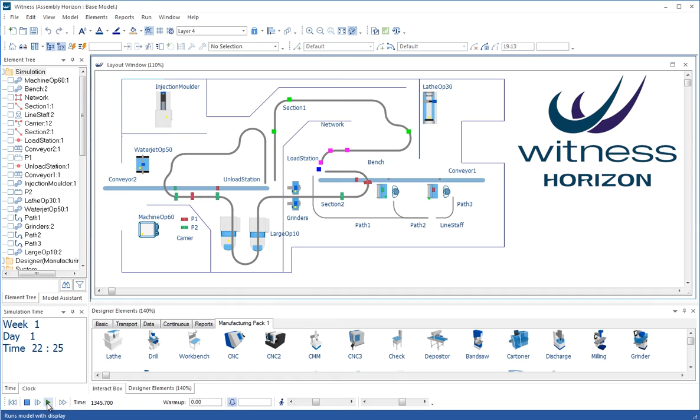Our 3D offerings continue to be underpinned by the best - the integrated 3D views and the optional immersive 3D platforms powered by Virtalis into the latest headsets and power walls. Witness Horizon is built for speed and quality of presentation.

Let's have a look at the release in more detail. This is in the Manufacturing Edition of Witness. There is also the Service Edition, which we'll have a look at a little bit later.

On the Start page, you have access to a lot of information - for example, all the recent models that you've used for easy access to those. You have a Getting Started section. When you click on that, it takes you through to the 2 Learning Witness books, all of which have been redone for this release. Essential reading if you're going to start using Witness for the first time.

We've also put in this section now the Witness Horizon release notes. So if you're interested in learning in even more detail than this session gives you, then please have a look at those release notes there.

Then there's a link to some new video tutorials to take people through in detail how to begin using Witness. Then a link to sample models in Witness - every single model has been updated for this release, so there are a lot of models in here. We'll have a look at a few a little bit later, but a lot of these models have been updated to illustrate the new features and the new graphics, especially in Witness Horizon.

A new quick reference guide with all the new functions and updated toolbar buttons and the like, and then a range of other access to other information, including the Witness Support portal.

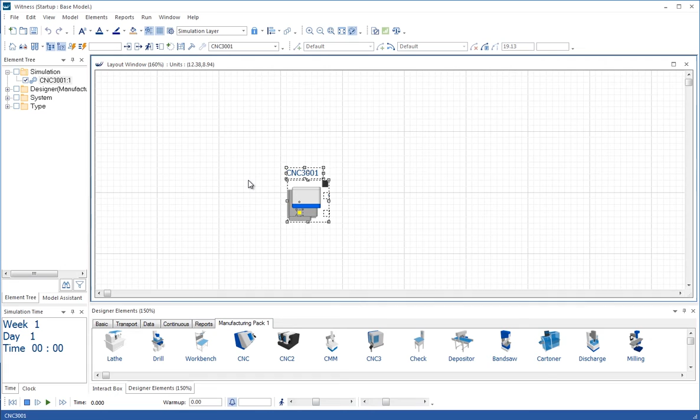When you drag one of these elements onto the screen, you get the 2D element for it. Let's drag in a whole load of different ones here, and let's see how that passes through into the 3D display. So we'll bring lathe 3 in, bring one of the presses in, etc. These are all scaled to suit the general scaling in Witness, which is a distance of 5 meters for one of the large squares here.

We say 5 meters, but we actually term it units, so that if you wanted to work in other units, then it's entirely up to you. You can redefine the scaling on the Model, Options, Coordinates tab.

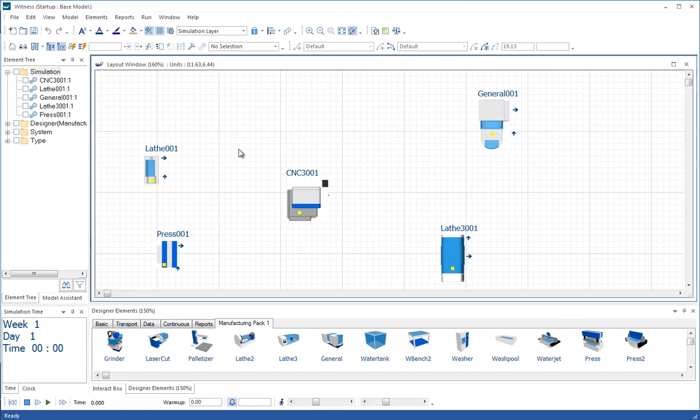Let's use the new 3D button then and create a new 3D view, and you'll see that exactly the 2D layout that you have has been faithfully reproduced in 3D. I'm flying around that just to let you see how easy it is to navigate around that 3D view using the standard commands.

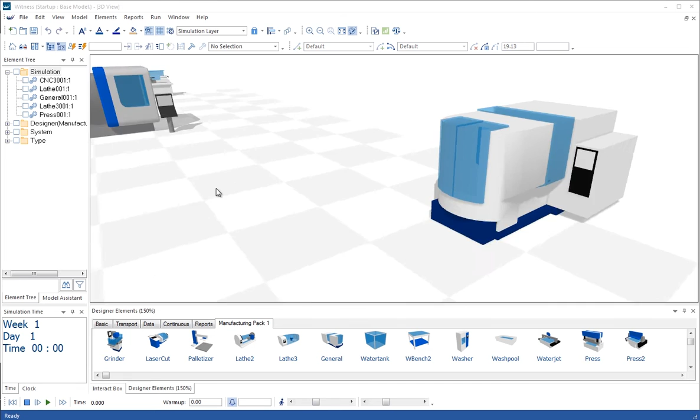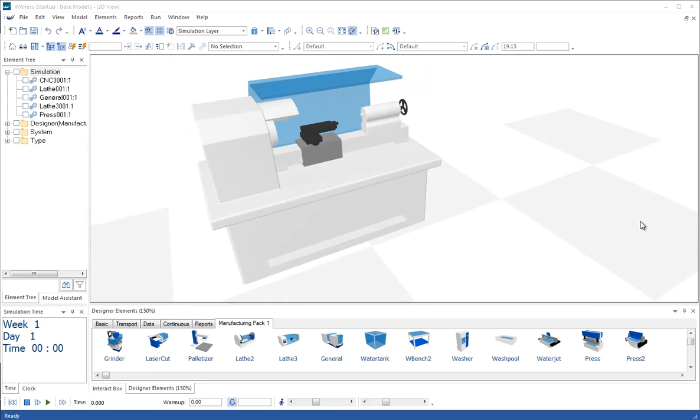We make a lot of use of transparencies in the new Witness elements, so that you can easily see the different parts being processed in a lot of the different machines. Some of them we've left open like this, again to ease that view. I'll just turn the shadows off - that's an optional item in Witness.

It's all extensible, so you can add your own 2D icons and add your own 3D shapes, but we've given you a much better start in that area with this new coordinated library.

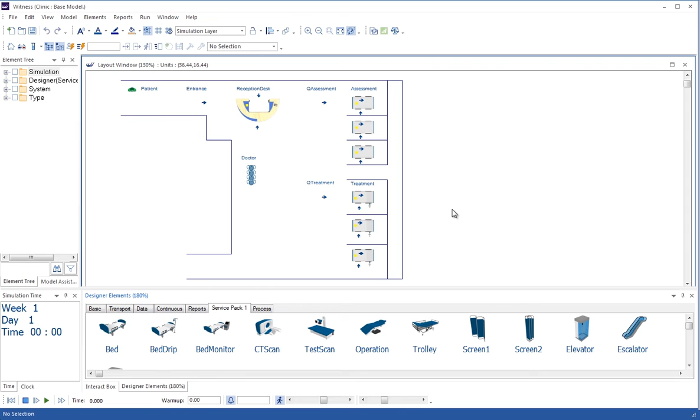And here is a model that is the new tutorial in the Learning Witness book 1 for the service edition, where a little clinic is a model that you build from scratch yourself, following the instructions. This uses the new graphics for the people, some of the beds and the reception desk here.

And if we take that through into the 3 dimensions, then we can see that we end up here with a very nice layout of people entering the clinic via the reception desk and being tended to on the beds by the doctors in the various cubicle areas here.

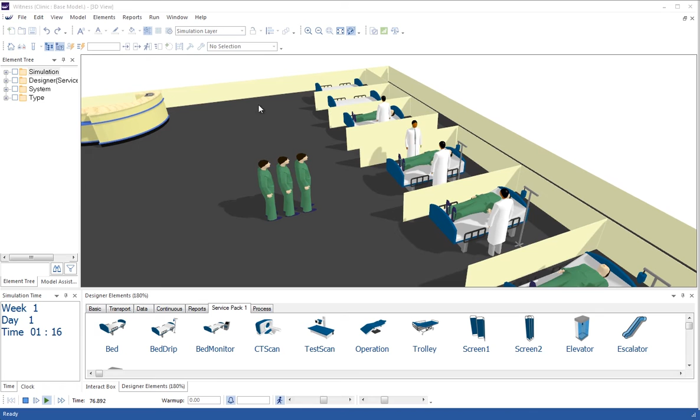This model also illustrates the fact that you can extrude the lines in Witness to create these nice wall effects. Very easy to do, and very effective in making the models look really, really good.

Let's return to the manufacturing edition of the software and look at the exciting new Witness floating toolbar. When you instantiate an element into Witness, above that element on the modelling window is shown the floating toolbar. This gives you access to a number of common properties and fields of that element that you can edit.

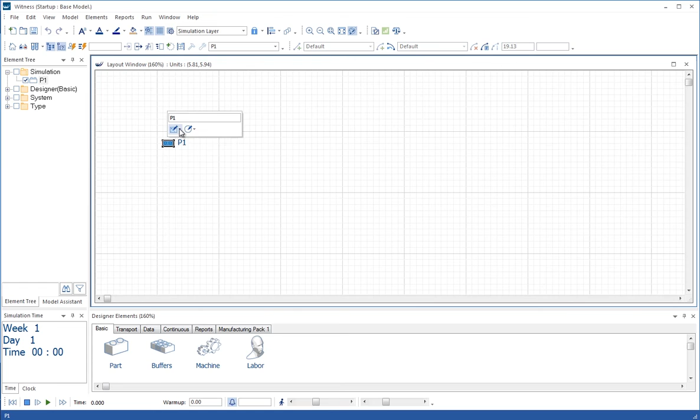Here I'm changing the name of the element to P1, I'm hitting return, and that change has been effected on the element backdrop here. If I right click on the icon here, I can use the icon selector to change and pick a different icon for that element. Here I'm picking the red icon for the part.

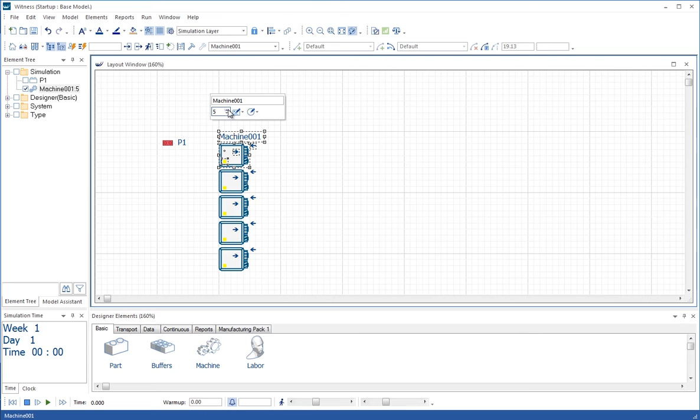And of course this works with other elements too. So if we bring the machine in here, for example, the floating toolbar appears, and I can change the quantity of that machine to 5. I can drop into the common properties here, and I can change the cycle time to 3.0.

I'm going to just click away somewhere else on another field to write it away, and then I can click away and that change will have been effected. If we look inside the detail dialog, we can see that the cycle time is 3.0 - that change has been made.

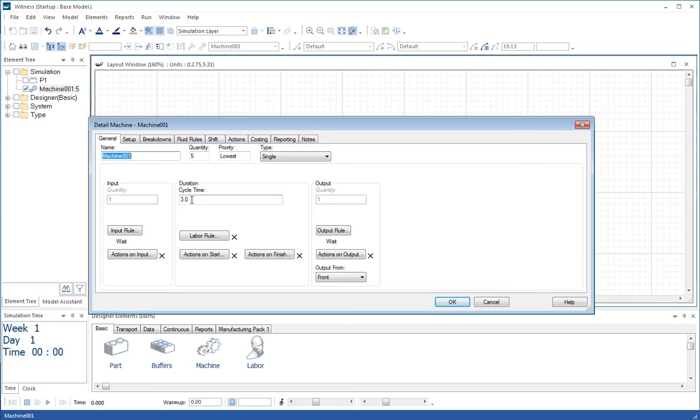It also works with the elements in the various packs. And if, for example, we want 4 lathes, it's as simple as that. It works with buffers too.

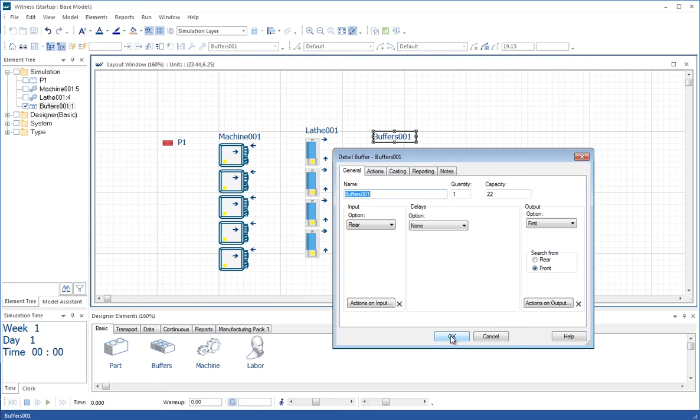If we bring a buffer in, then we could set the capacity of the buffer in this way. Click elsewhere, click away to set, and then we can see that the capacity has indeed been changed of that buffer to 22. So nice and simple, a real productivity aid, giving you the ability to change some of those common properties, firstly when they're instantiated, and secondly whenever you right click on an element and bring up its right mouse menu - the floating toolbar reappears and gives you access to these common properties.

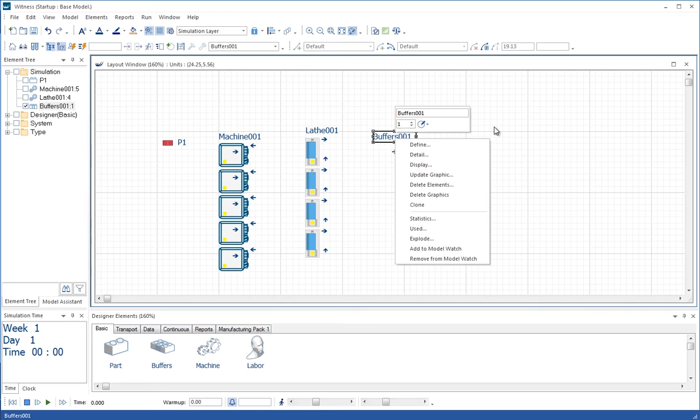Let's also make sure we look at the new part scaling in Witness, which is the default setting now. When I drop a part from the designer elements and double click on that part, we'll see in actions on create we have length, width and height set. Those are automatically used to generate the size of the part as it will be seen in the model displays. Now I'm going to just add an extra line here.

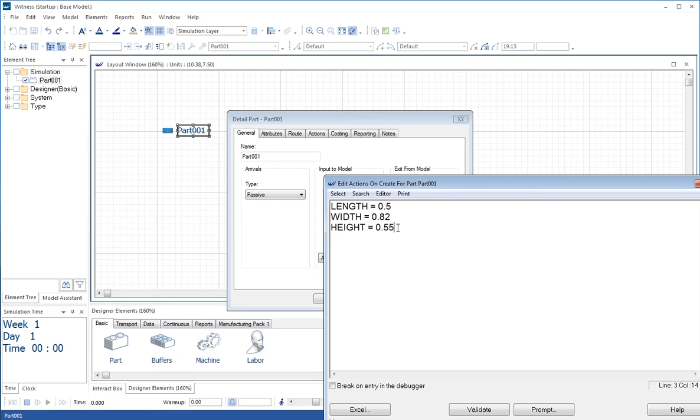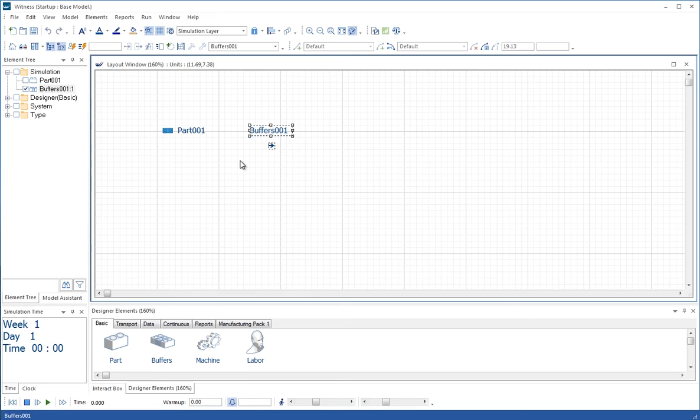I'm going to change the icon to IUniform(1,5) plus 130, and that means I'm going to get different coloured bricks coming in to the model. And then I'm just going to add a standard buffer, and route into the buffer using the little visual output rule button here.

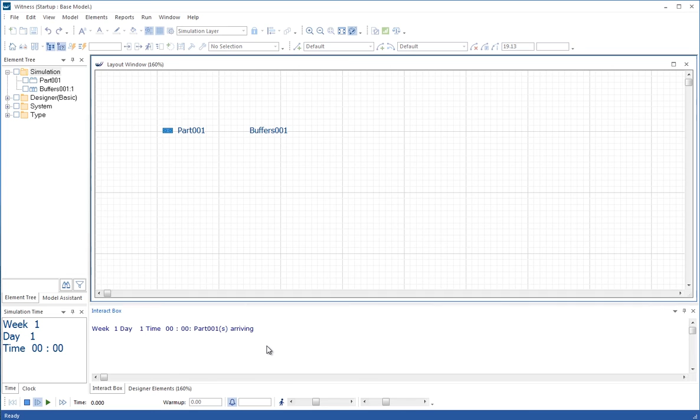And then of course it's going to prompt me as I step the model for how often do the parts arrive. So there's our first part arrived, a purple icon, etc. And the different coloured icons are being instantiated into the model.

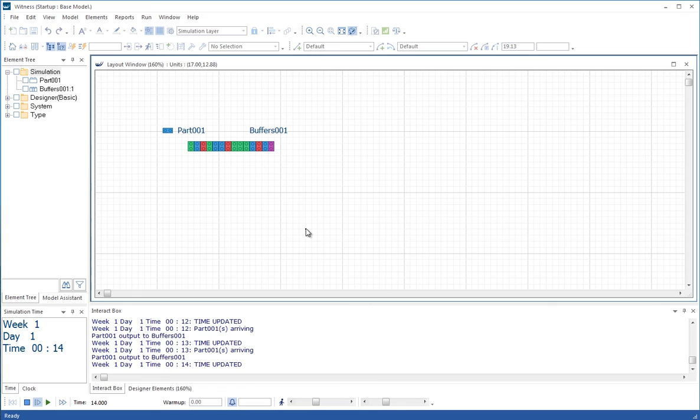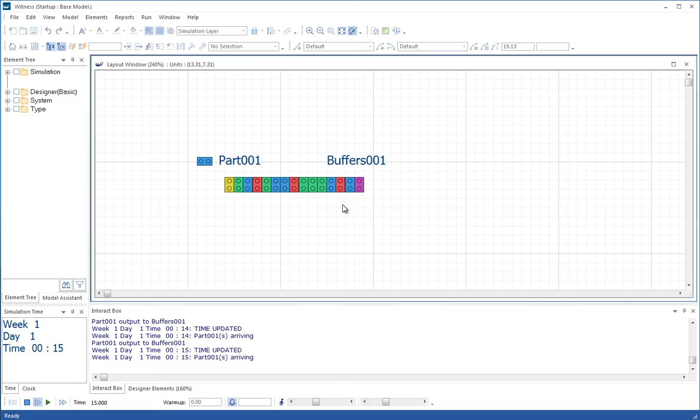So this is how the new icons look for parts, the default part, when they come into a model. But be careful if you change the part icon and it really is a different size, then you need to change the part size in the actions on create here for the length, width and height. Height of course being used in 3D for the element.

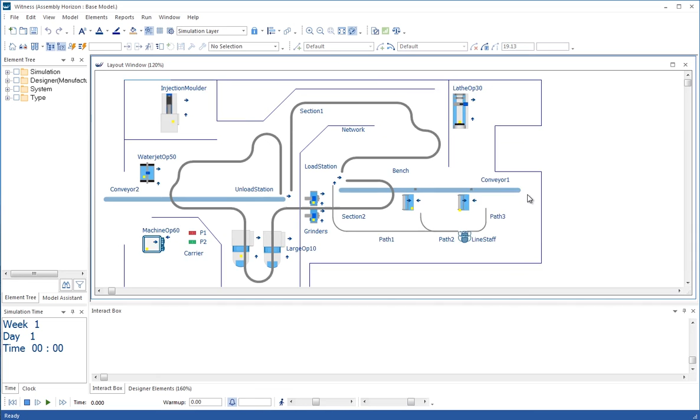Let's look at a couple of the sample models in the manufacturing version. The first one I'll open is Assembly Horizon, and this is a good demonstration model for the new look and feel in general of the new release. If we set it running, you'll see power and free elements arriving to a station where the parts are loaded coming along from 2 workstations.

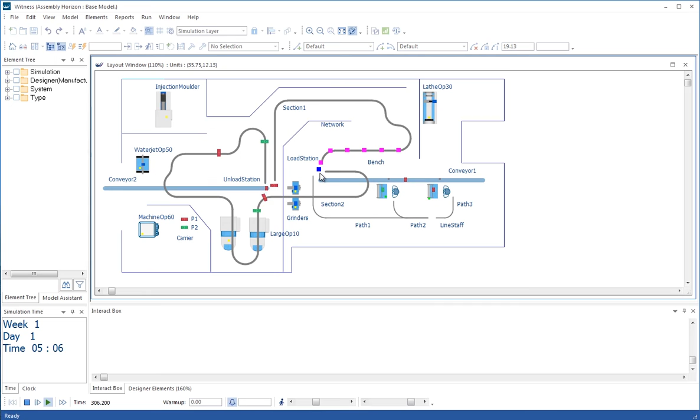People are moving along a little path network here between their workstations, and when the load station needs some attention due to it being broken down, the transport around the model on the power and free sections moves it from here to this other conveyor where things move out of the model.

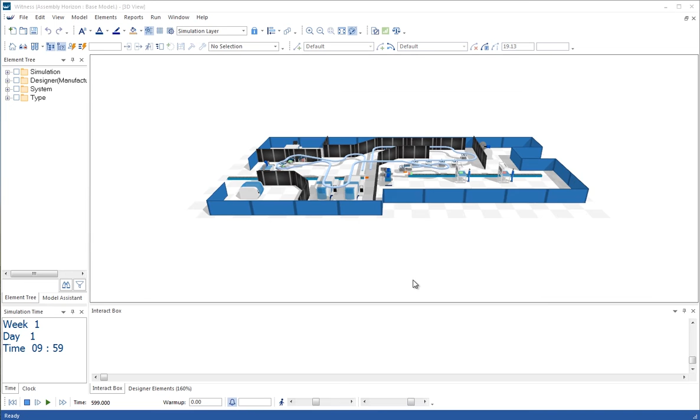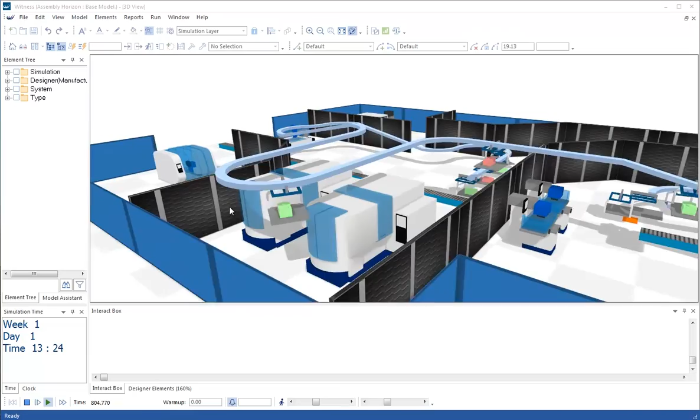If we do a quick 3D of this model, we can see again we've used extrusions for the different walls, and let's set it running. Here we see the walking men moving along the path displays, and maybe we need to just slow that down a little bit to see the power and free carriers come along, pick up a part, move up and over the partition area here above some other machines, and then we can see them being put down onto the second conveyor here.

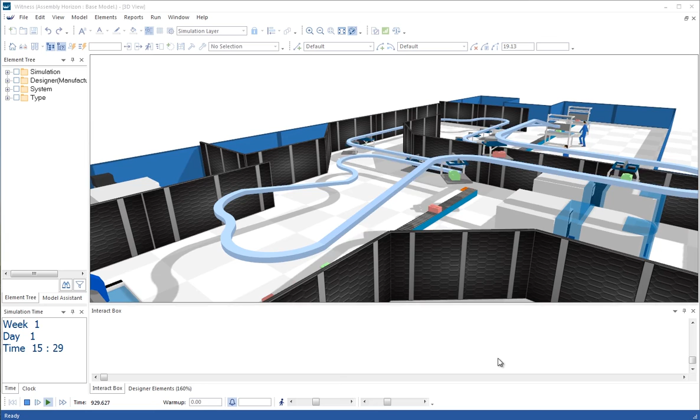So this is a model you can look at in detail to see how it's set up, how the extrusions are done on different layers in Witness. We have the option for shadows on, shadows off, and wireframe in the 3D view, as standard, as was in Witness 14. But the crisper, better appearance of the 3D machines and graphics, we think means that Witness Horizon is a step up in terms of the 3D appearance and performance.

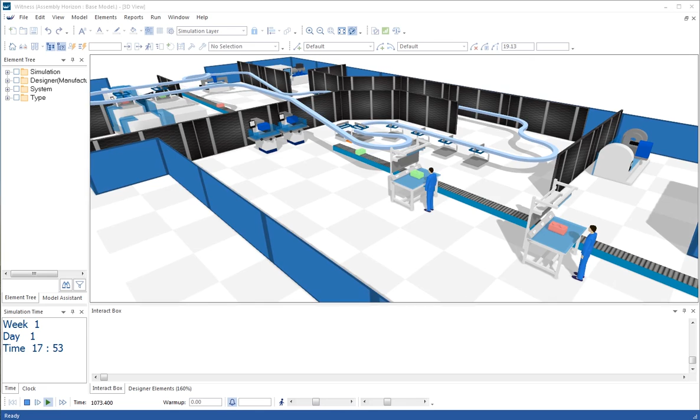Let's have another look at another model here from the Manufacturing Sample Models directory. Here's one of the process cell models that we have in Witness, where people follow work around a process cell, working on it at each workstation.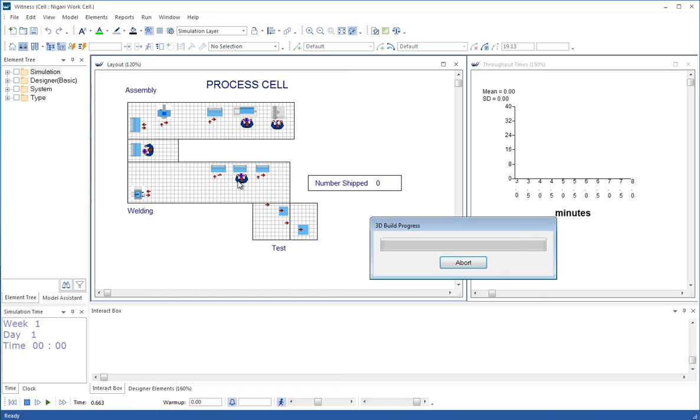Let's stop the model and do a quick 3D view of this. And here we see the upgraded version of this display with the people walking around from station to station doing the essential work that's required.

Let's take a look at a new model called Pipeline Horizon. This helps explain and show the new look and feel and the new options available for the fluids changes in Witness Horizon. There are many improvements in calculation in Witness Horizon.

The release notes give a link to the Wikipedia reference for Kahan summation. This is an algorithm that we've implemented in Witness Horizon that adds up lots of remainders in calculations and reapplies them at the point where they accumulate to a certain extent.

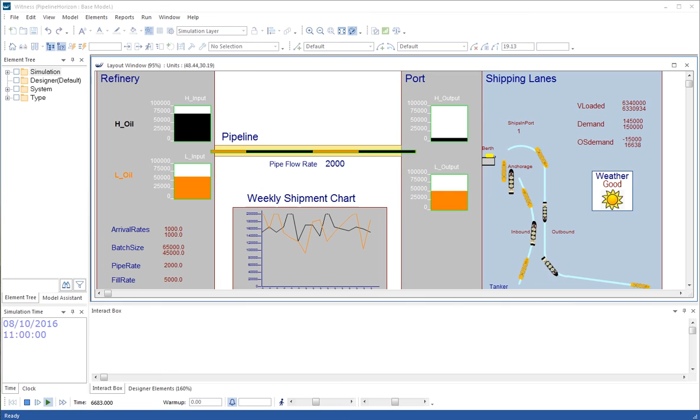Added to that, we have higher resolution of a lot of different numbers. For example, before and after the decimal point is represented as two values in many calculations rather than a single value. This gives us higher precision, especially where there's high flow rates and where there's small quantities of fluids left in tanks. Time also is calculated and stored as two numbers, the value before and after the decimal point, and improvements in the numerical comparison operators using a scaled epsilon when comparing numbers for equality. Those techniques ensure greater stability as well as precision when representing fluids.

Now we also have a number of display improvements, some of which are on show on your screen here. You now have a lot of control over fonts and decimal places shown for different values. For example, the tank calibrations here or the pipe flow rate here we can show with no decimal points because the value is in the thousands, so we don't want to see decimal points for that kind of value.

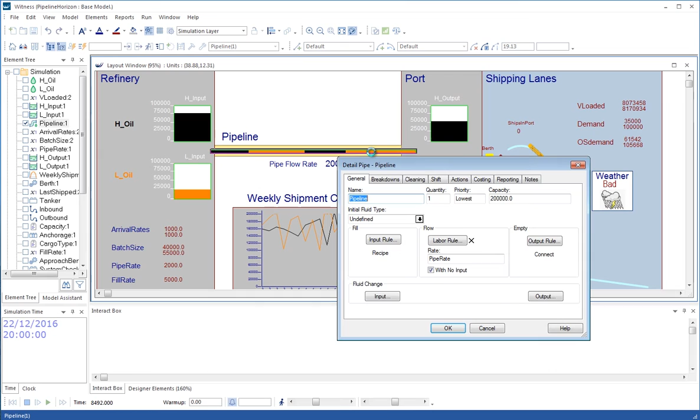There are new rules and options available in the fluids area as well. For example, the output rule for this pipe is a connect rule, which connects a certain fluid type to a certain output and another fluid type to another output. That easy splitting of fluids into different tanks is something that was more difficult before.

Now you can flow out of a tank where there is a mixture in it, drawing a certain liquid out of that mixture, which helps modelling separations. For instance, oil and water, where you let things settle for a while and then draw off the lower or upper layer from that tank. So there's a new connect rule and flow rule, allowing you to specify fluids for part of the flow, which is new and very powerful in the new Witness release.

We also have the option in Witness Horizon to interrupt parts filling with fluids. This is the interface between the discrete and continuous worlds.

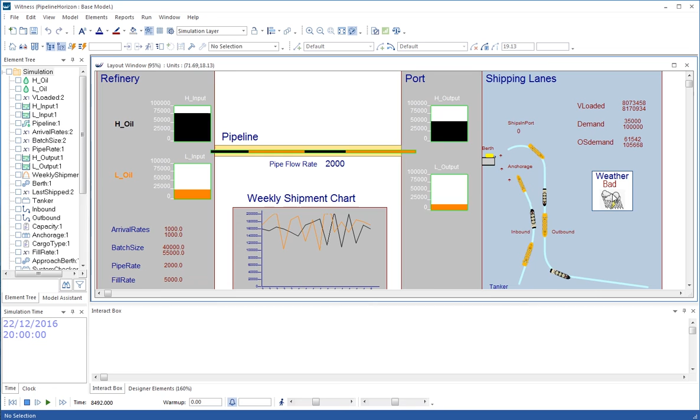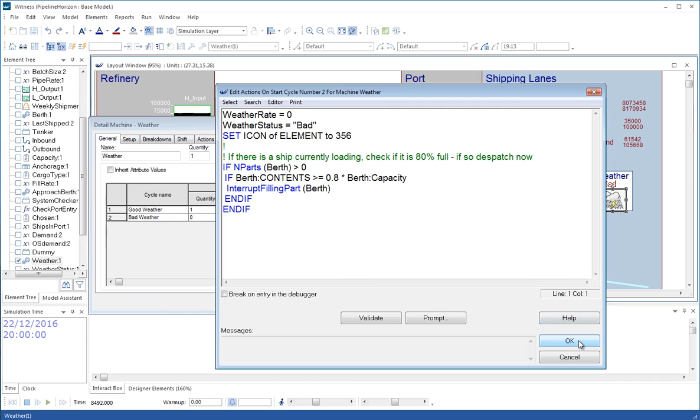For example, if I double click on weather, we can look in the actions on start of bad weather, where we're checking whether a ship is above 80% of the fill it was going to get when the bad weather starts, which interrupts the filling. We use a new function, interrupt filling part, to stop that filling and send the ship on its way if it's more than 80% full. So there are new functions to interrupt the filling or emptying of parts.

Now let's take a look at some of the exciting new animation possibilities in Witness Horizon. In this model, we rotate the robot icon as the robot machine A is cycling.

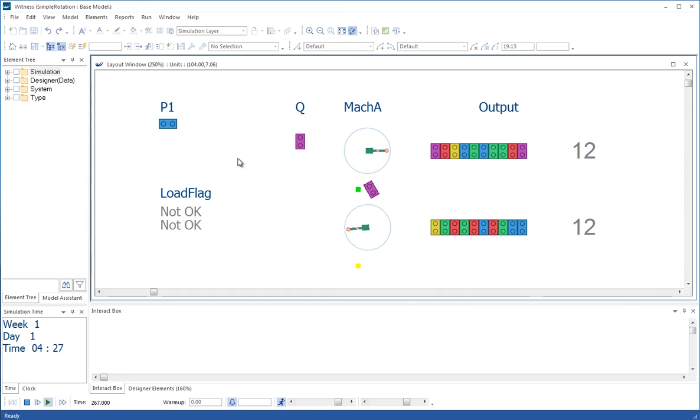How is that achieved? Let's go into the detail for the robot. On the cycle, in actions on start, we're looking to see where the machine icon is situated - machine A icon is number 1 - and getting its X and Y position. We leave it in place using the MovePosn command, but rotate it by 180 degrees over 10 time units, set equal to the cycle time, updating the animation every 0.1 time units.

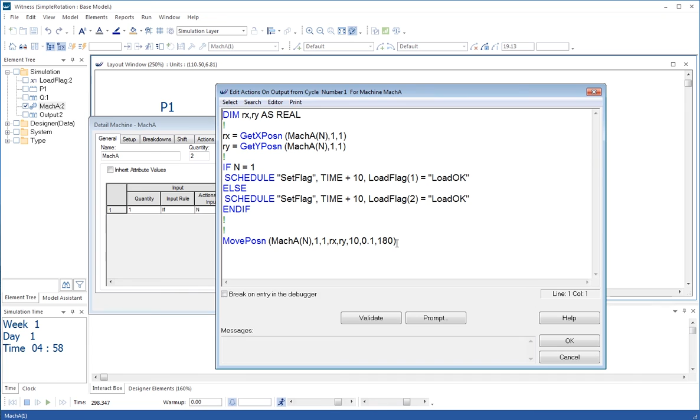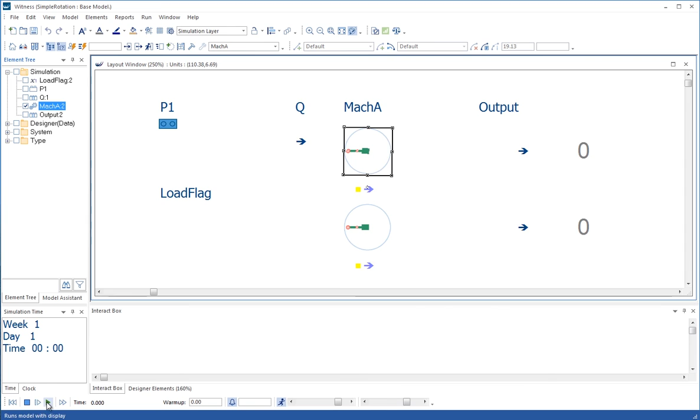The return for the robot is done in the actions on output, where we rotate it by another 180 degrees to return it to its loading position while not actually loaded with a part. We could change that second action to minus 180 degrees, in which case the robot would return using anti-clockwise motion instead.

Now in a different model, Storage Horizon - not one of the sample models, but available via the portal soon - we see a 3D view of a model. If we start it, we can see the cranes lifting and placing items in storage in the tank area.

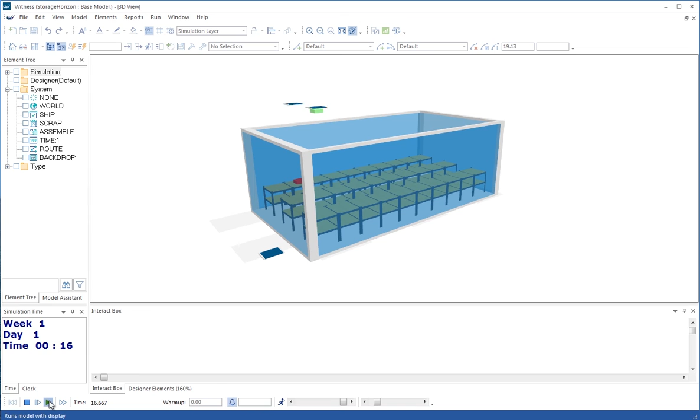These are machines that are moving, specifically crane machines, and we can run these at a variety of different speeds for the movements. This model also makes use of another function called slow motion setting.

That tells you the position of the slow motion slider bar shown here with the cursor, and returns a number based on where that position is, such that if you want to run the model more quickly, you can put in a higher figure for the update interval of the movement.

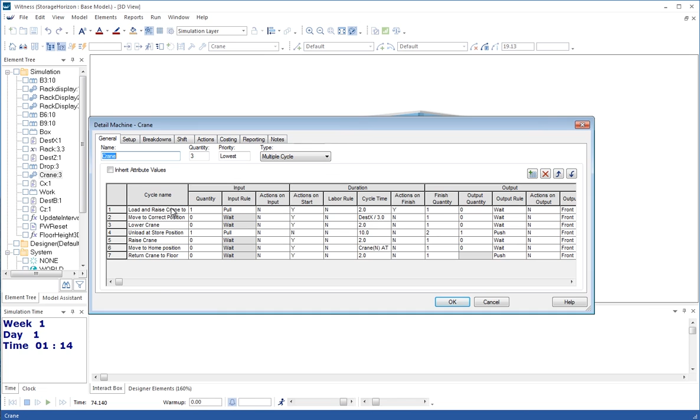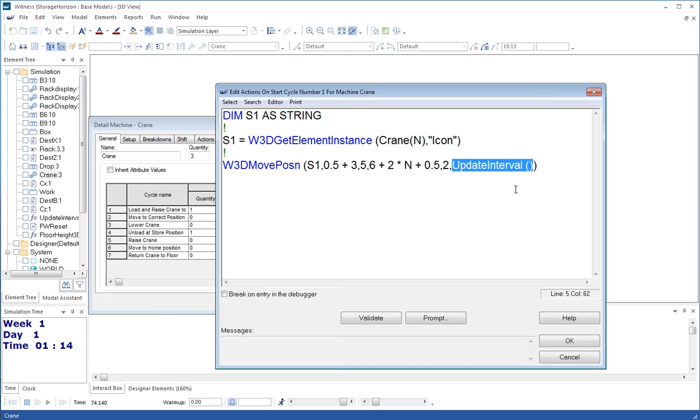Let's look in the tree at the cranes, and where that movement is done. The movement for the crane is done in 7 different cycles on the multi-cycle machine. In the action, we're doing this movement in 3D, finding the identity of the geometry linked to the icon of the crane, and doing a W3D move position function to change its position to a new XYZ point over 2 time units, with a calculation for how often we update that animation in the update interval.

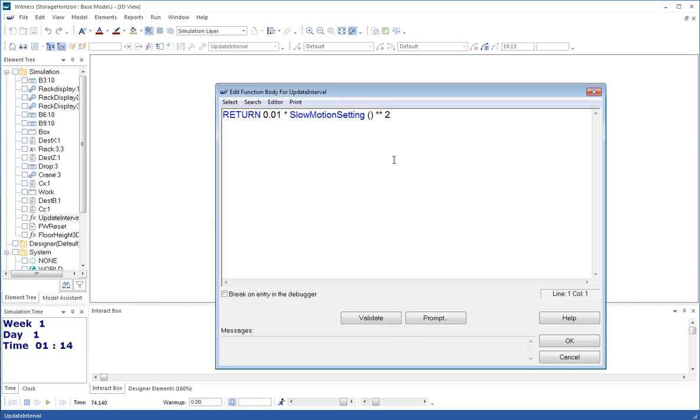If we go back to the tree, we can look at update interval, which uses this new slow motion setting - I'm actually squaring the value. If that's set, it returns a value between 1 and 10, 1 being the slowest setting, so that will return either 0.01 right up to 0.01 multiplied by 100, giving a value of 1. That's quite a significant difference in how often the values here are being updated.

Witness Horizon: fast, productive modelling that looks great too. I hope you've enjoyed this introduction and are inspired to explore and see what it can do for you. Thank you for watching.